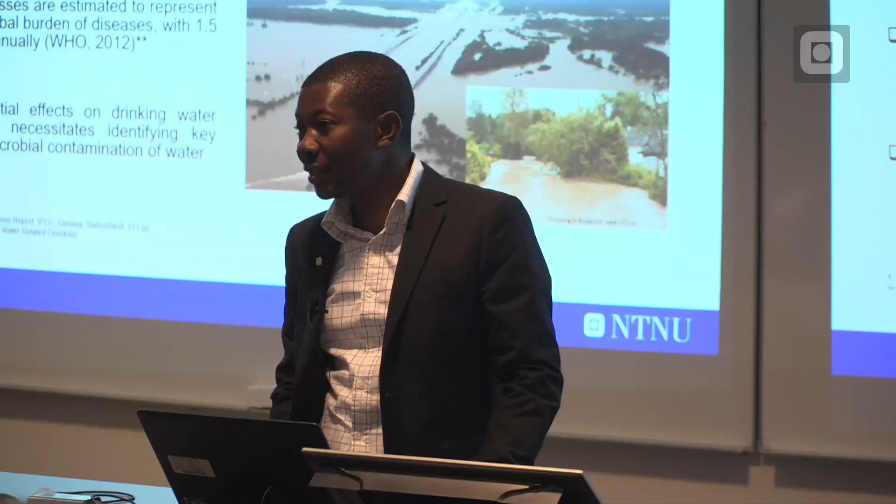There is a consensus among scientists that our climate is indeed changing. A lot of compelling scientific evidence is seen currently in the form of changes in air temperature, increases in average air temperature, and occurrence of severe weather events like severe rainstorms and droughts. According to the Intergovernmental Panel on Climate Change, the occurrence of extreme weather events is likely to increase in the 21st century.

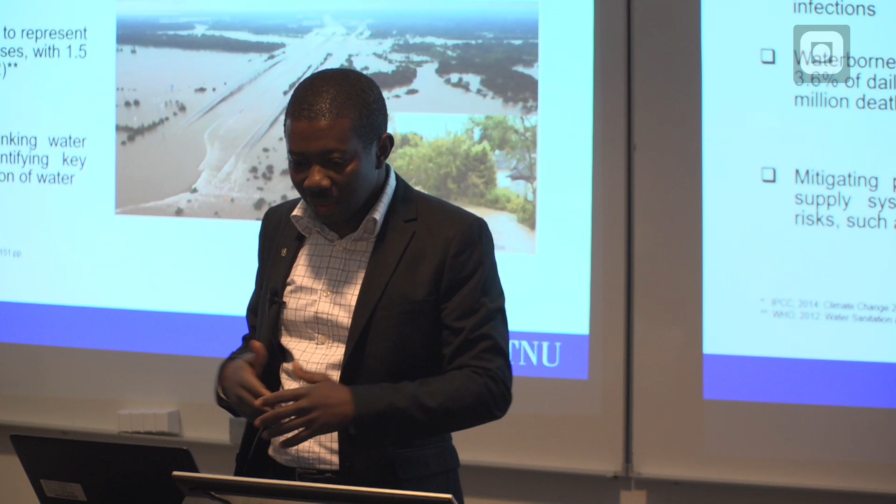These weather events, whether rainfall, flooding, or increased temperature, are linked to deterioration of the quality of surface water bodies, and these often lead to the occurrence of waterborne infections. In fact, waterborne illnesses are estimated to represent about 3.6% of the daily global burden of disease, with 1.5 million deaths occurring annually, according to the WHO.

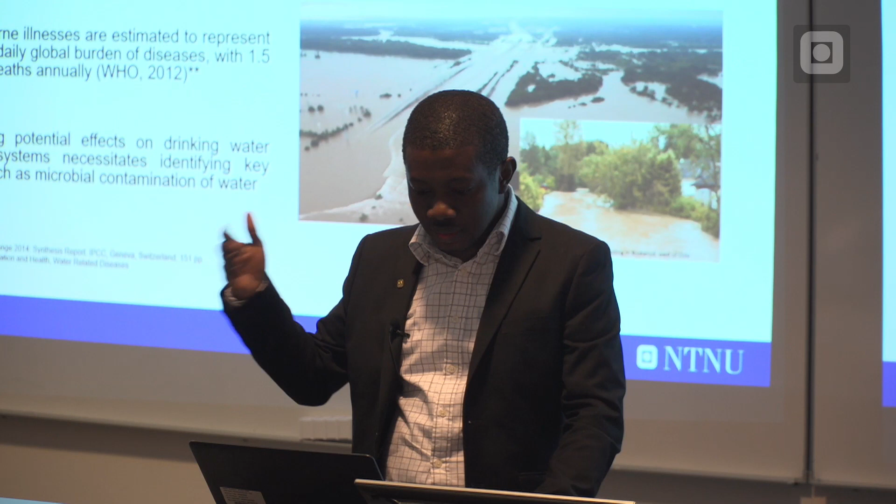In order to mitigate the potential effects of climate change on the risks of waterborne infections as a result of drinking water, it is important that key areas of risk throughout the water supply chain or system should be identified, so that corrective actions can be taken if possible.

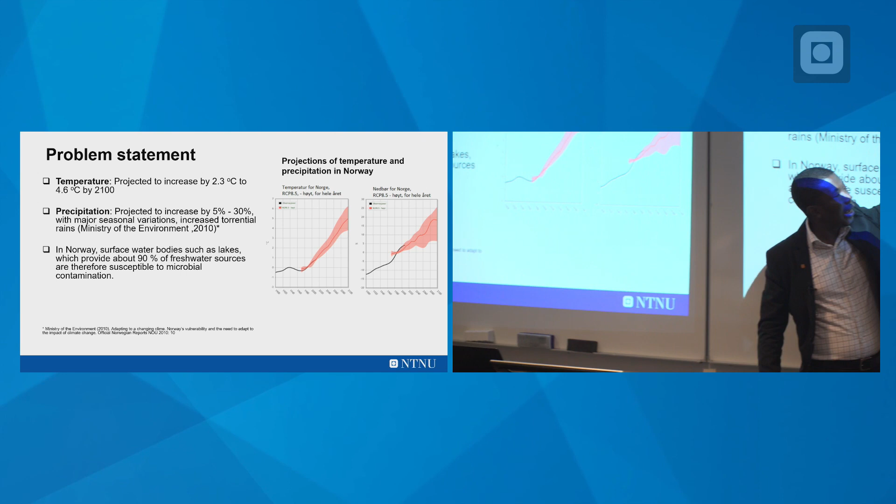Now in Norway, under the current emission rate of greenhouse gases, if the rate continues into the future, then by the year 2100 air temperature is projected to increase by between 2.3 to 4.6 degrees. At the same time, precipitation, rainfall and snow are also expected to increase by 5% to 30%, by the year 2100.

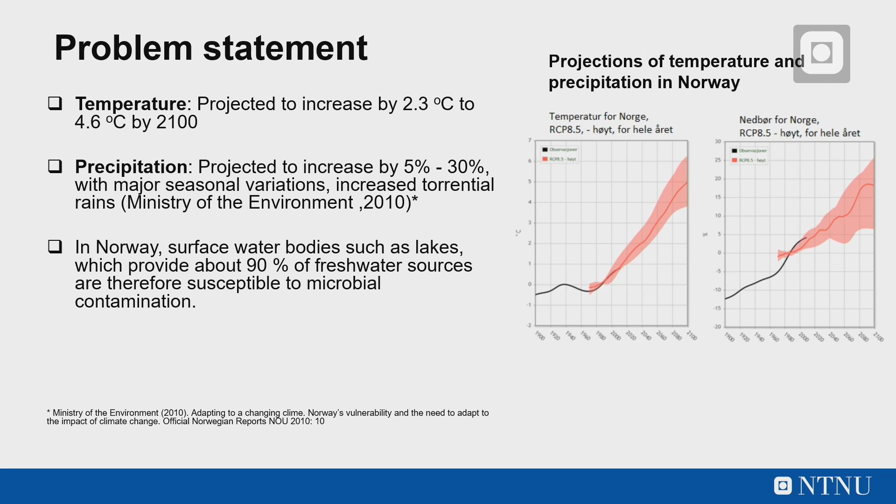One thing that's very important here is that the majority of water supply systems in Norway actually rely on surface water bodies like lakes and rivers. So if these weather parameters, temperature and precipitation, are likely to increase, then it calls for action.

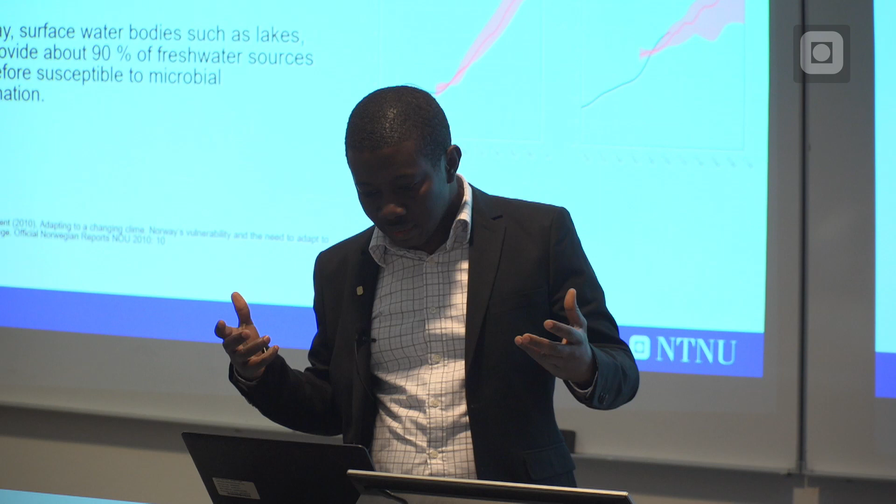At least it will be necessary for water supply systems to know the potential risks at different levels. So the aim of this research was to evaluate the potential consequences of current climate projections in Norway on the risk of pathogen infections from treated water consumption in Norway. In line with this aim, the following research questions were addressed in my thesis.

First, how could climate change affect temporal variations in source water quality under different climate scenarios - that is, the baseline and hazardous situation? Second, what are the likely effects of changing climates on the runoff and discharge of microbial organisms in the catchment of the raw water sources?

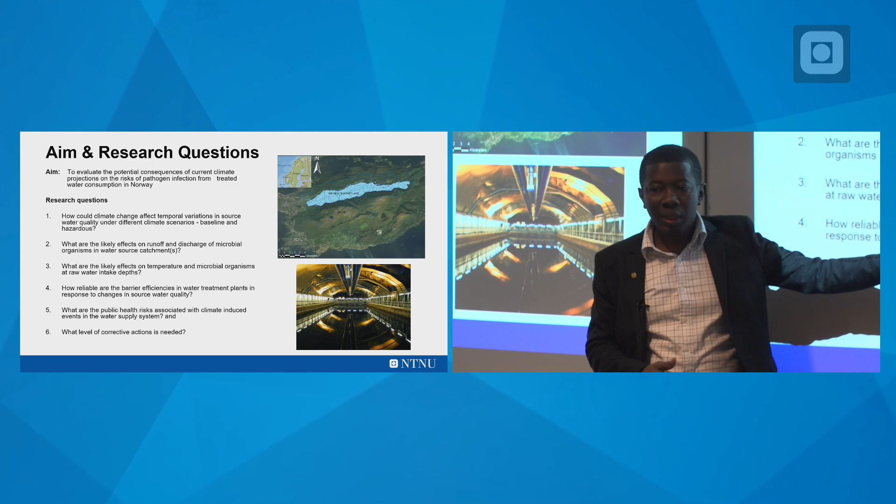What are the likely effects on temperature and microbial organisms at raw water intake points, or at depths inside the raw water source like a lake? And how reliable are the barrier efficiencies in the water treatment plants in response to any changes in the quality or microbial quality of raw water that can be linked to climate change?

And what are the public health risks associated with climate-induced events in the water supply system? And then, what level of corrective actions will be needed?

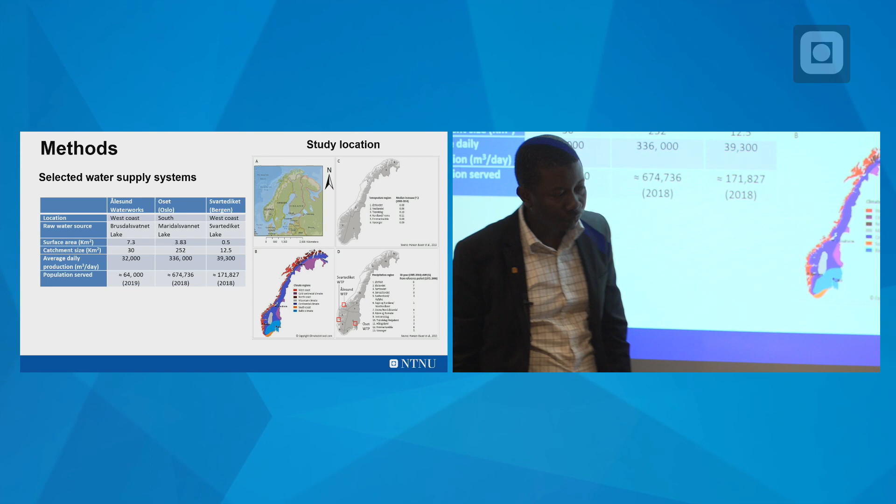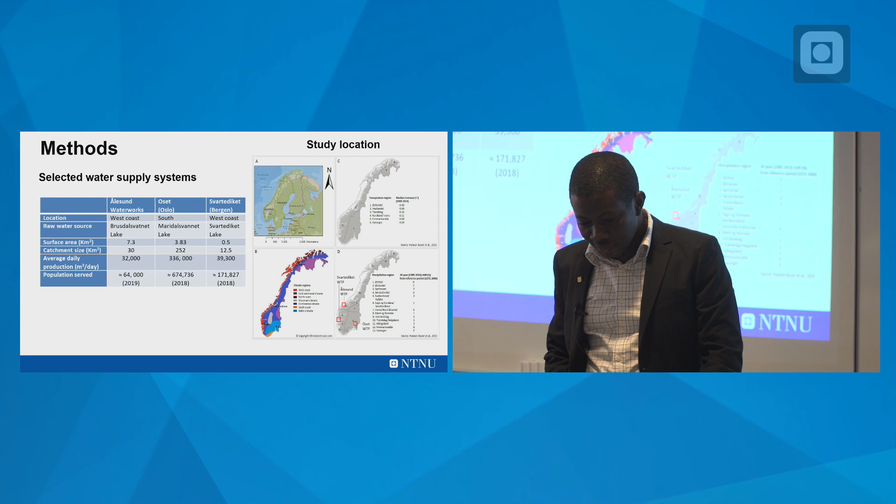The target was to cover as many regions as possible, but due to challenges with data, I focused on 3 precipitation zones, 2 on the west coast and 1 in the southern part of the country.

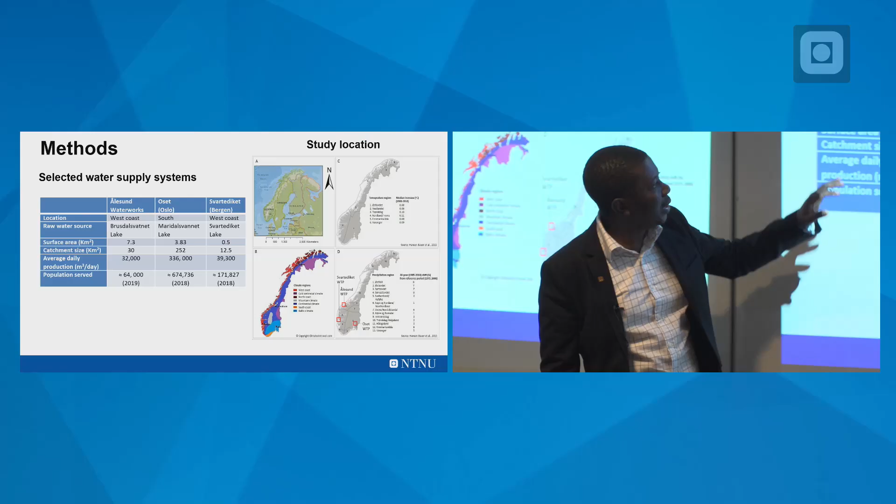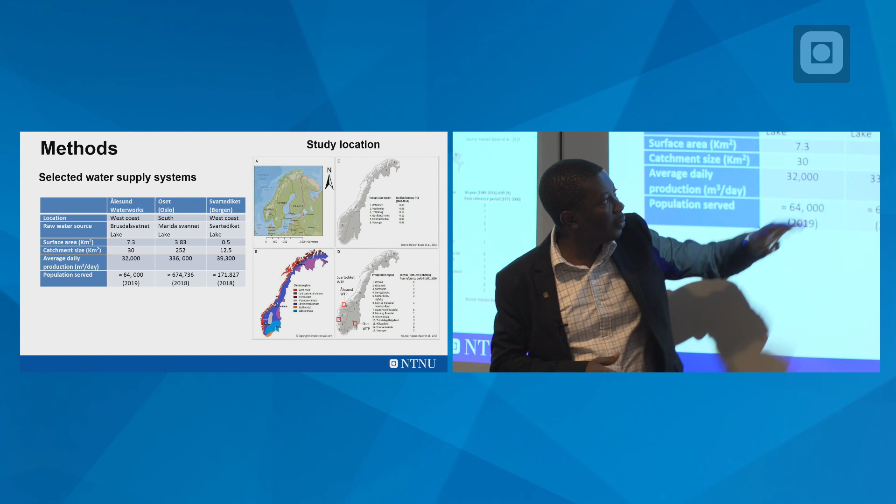The water supply systems I included in my study were mainly the Ålesund waterworks, which draws water from the Brusdalsvatnet Lake, and the one in Oslo, Oset, which is the main water supply system for the central part of Oslo and also uses water from Maridalsvannet. The last one was Svartediket Lake in Bergen.

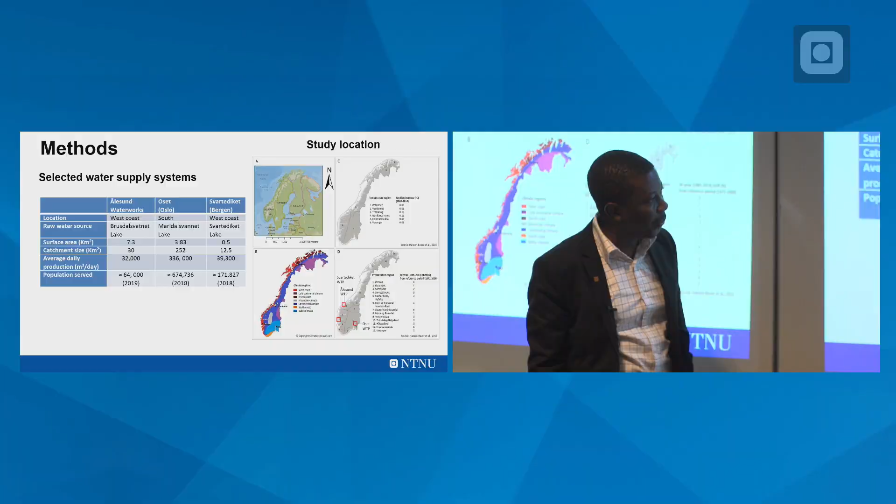Among the 3, Oslo is the largest, with daily average production of around 336,000 meter cube per day, and serves a population of nearly 670,000 as at the first quarter of 2018. So these were the main water supply systems assessed in the thesis.

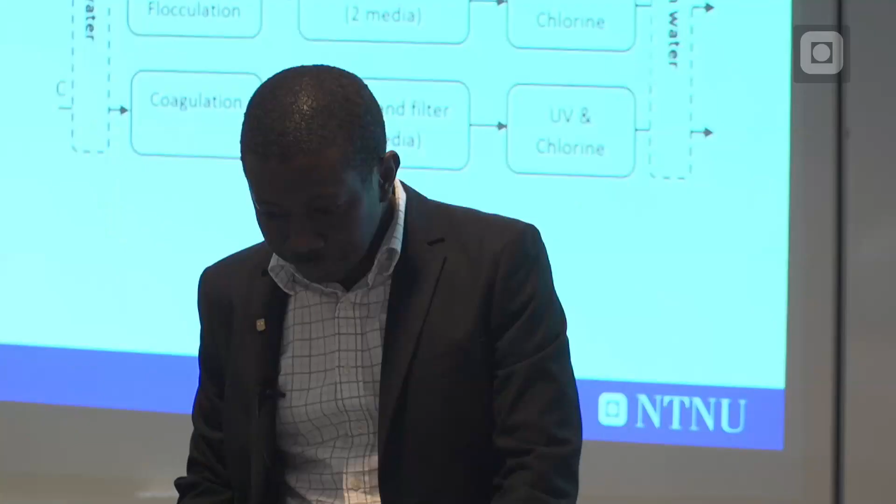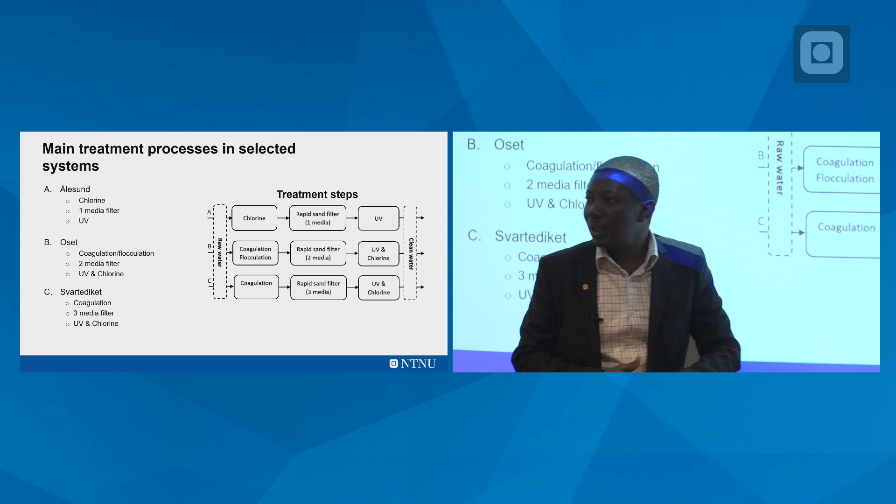These water treatment plants - Ålesund Waterworks, Oset, and Svartediket - have almost similar water treatment processes. For instance, they all use rapid sand filtration, although with varying types: Ålesund uses 1 media, Oset uses 2 media, whereas the one in Bergen uses 3 media. They all have UV disinfection.

There is some difference here: for the Ålesund Waterworks, chlorination occurs first before rapid sand filtration, and finally the UV disinfection.

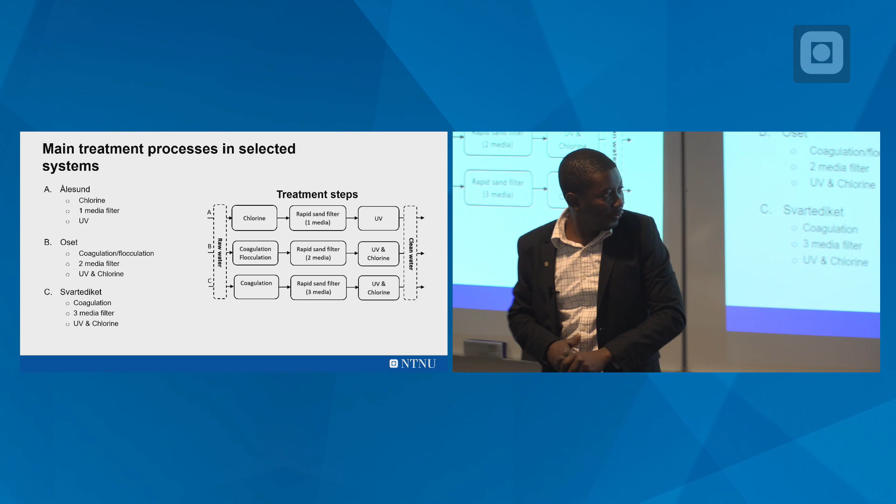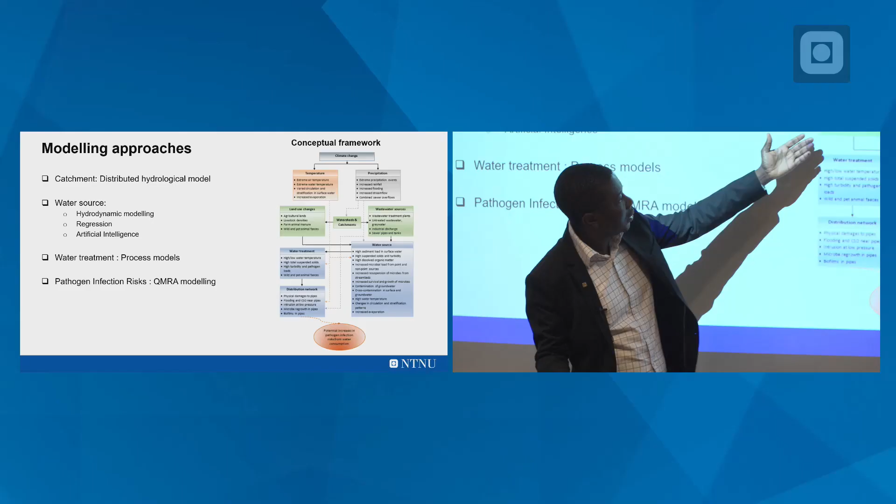In order to assess the potential effect of climate change on the water supply system, I prepared this framework as a guide, because the water supply system is composed of the catchment, the raw water source, the treatment processes, and the distribution network. I tried to look at potential impacts on runoff generation in the water source catchment, as well as discharge of microbial organisms, as that can be linked to changes in climate change, air temperature, and precipitation patterns or frequencies.

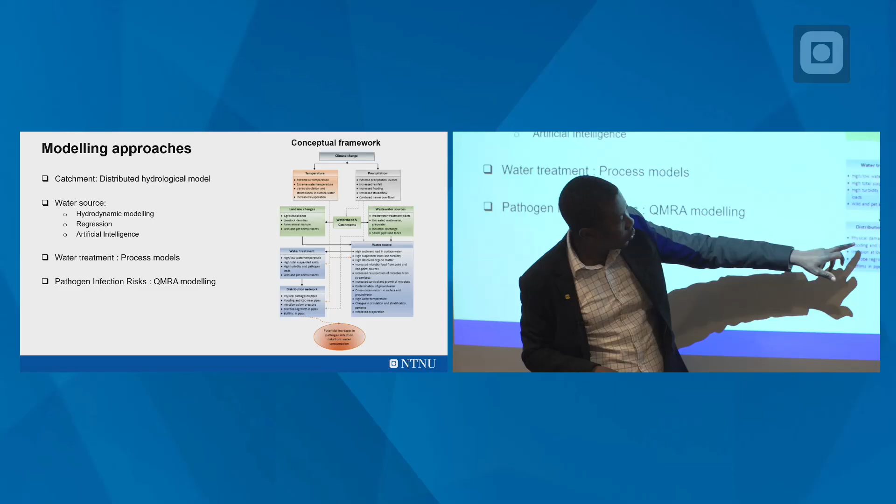I also looked at potential effects here in the water source and some aspects of water treatment. There is one important part, the distribution network, which unfortunately I couldn't account for. From the results, I was able to calculate potential risk at the end of the water supply system with respect to consumption.

In the water source catchment, I applied hydrological modeling. Within the water source, that is the lake, I applied a combination of hydrodynamic modeling as well as regression and artificial intelligence models. In the water treatment stage, I applied process models to calculate the log reduction or efficacies of the treatment steps in removing pathogenic organisms from water. Finally, I applied quantitative microbial risk assessment modeling to calculate the pathogen infection risk associated with water consumption both presently and in the future.

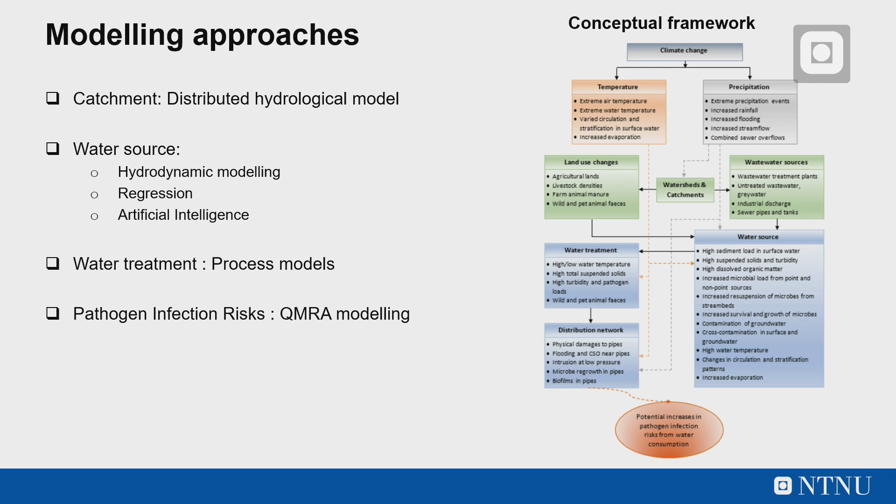A quick look at the various modeling approaches at the various steps. As I said, I used a hydrological model in the water source catchment, and the model used here is the Soil and Water Assessment Tool, which is a physically based and distributed hydrological and water quality model.

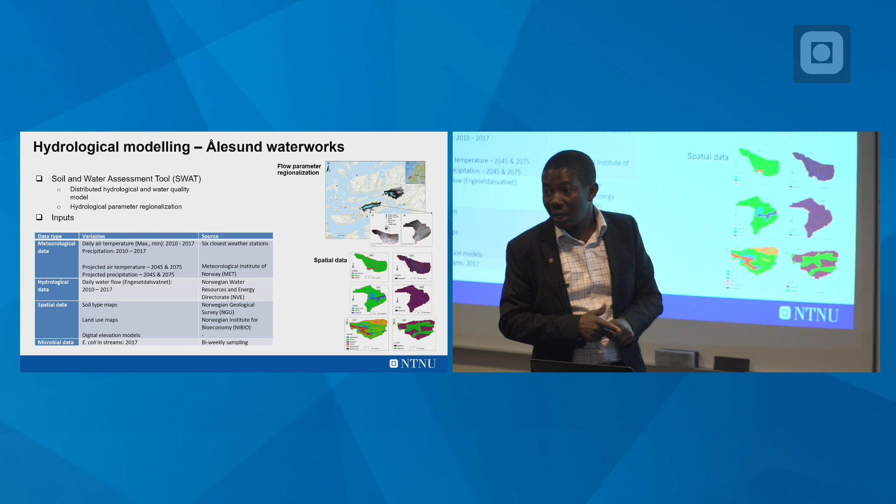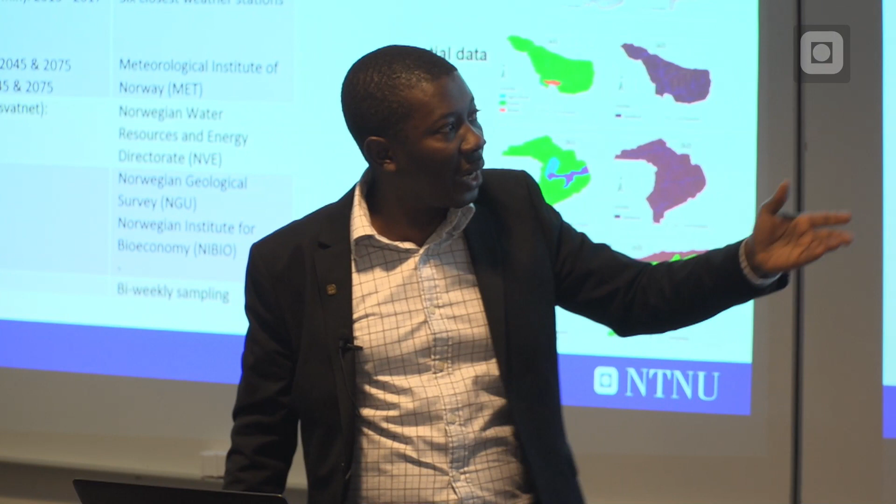Because it is physically based and distributed, the catchment is subdivided or discretized into different areas known as hydrological response units. For each division in the catchment of the water source, we define specific spatial and weather characteristics, so that flow or runoff generation is calculated for specific areas and finally combined. I applied this hydrological modeling at the watershed or catchment of Brusdalsvatnet Lake, which is the water source for Ålesund commune.

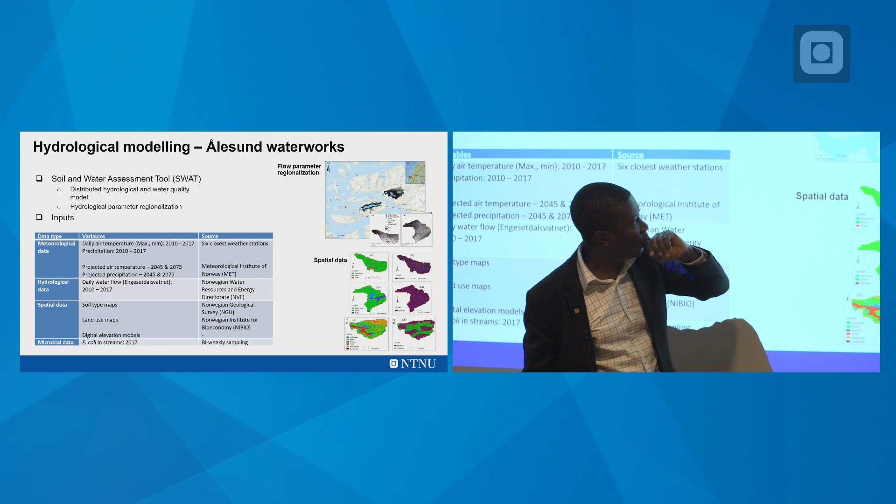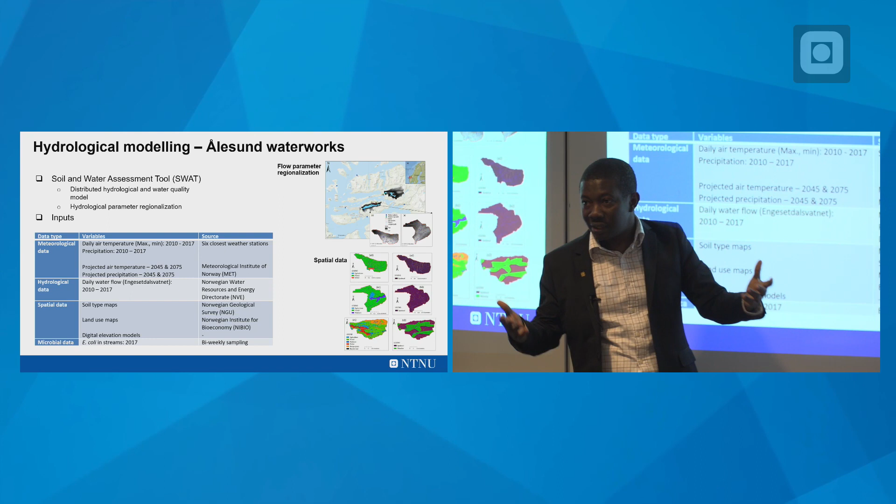But currently this lake is not gauged, so in order to calibrate the hydrological model, I used a method commonly applied in hydrological modeling known as flow parameter regionalization. When we have catchments that are close by and share similar spatial and meteorological characteristics, it is possible to calibrate the model for a gauged catchment and then transfer the parameters to assess runoff and other contaminants in the other catchment.

That's the method I applied, and the main inputs were daily air temperature, maximum and minimum values taken between 2010 and 2017, precipitation data for the same period, as well as climate projections of precipitation and air temperature for 2045 and 2075.

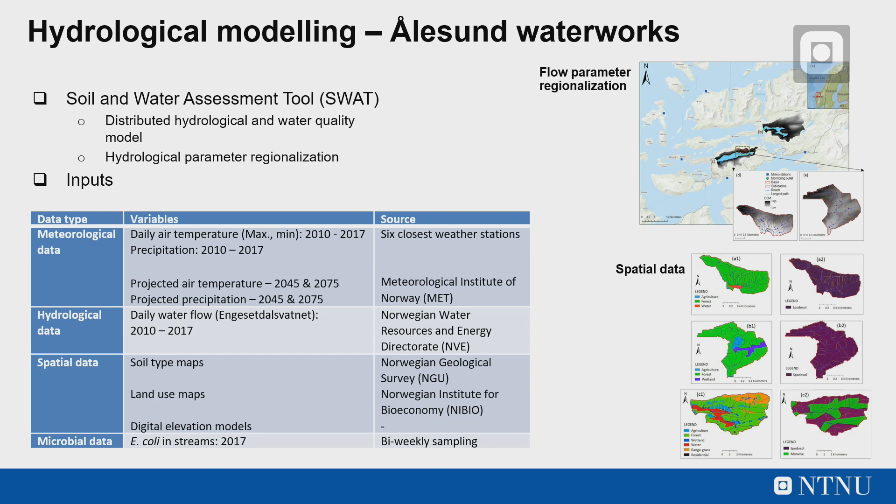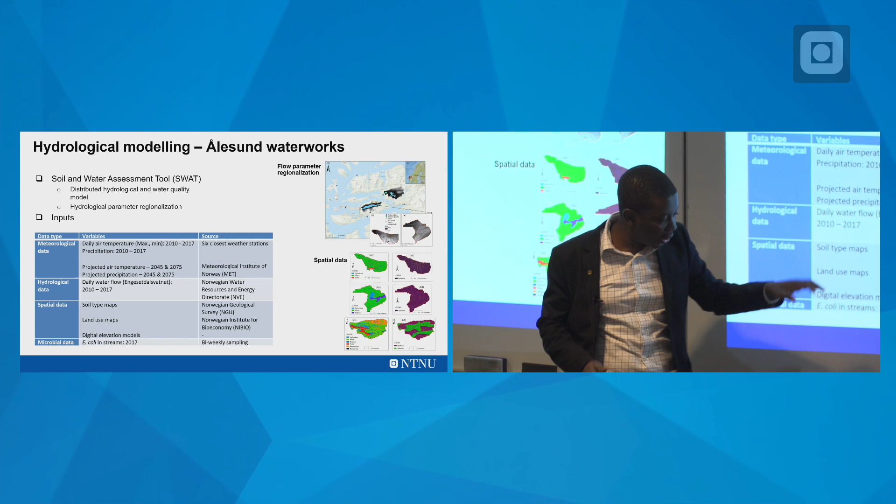And then I use the flow data from the donor catchment, which is the Engeset Dals Lake, also for the same period. Of course, other data included soil type maps, land use, digital elevation models, and I also carried out some sampling of the streams that discharge into the lake in order to compare with the model results.

Inside the water source, as I said, I applied the hydrodynamic modeling, and the system I use is known as the Generalized Environmental Modeling System for Surface Water. It is a hydrodynamic and water quality model that relies on the solution of shallow water equations and other auxiliary ones.

The main inputs here were air temperature, pressure, cloud cover, etc., as well as the hydrological data from the calibrated model, because the hydrological model was calibrated for the major streams, 4 of the major streams around the lake. So I use that as an input to assess how these changes in the flow patterns can affect the occurrence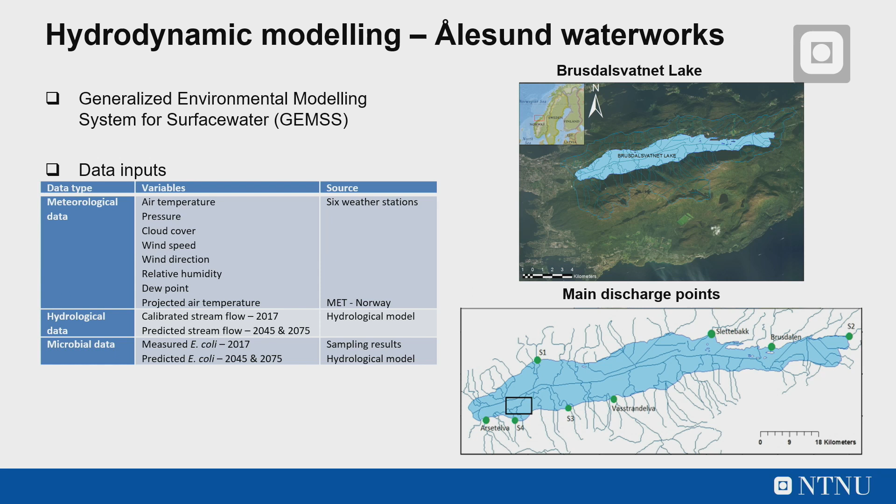of the microbial organisms in the lake, both presently and in the future. And then in the same water source as well, I applied both statistical models, as I mentioned, the regression, zero inflated Poisson regression, and zero inflated negative binomial regression to predict the occurrence of microbial organisms at the raw water intake points in the lakes or the surface water bodies. Now, I also applied artificial intelligence models for the same purpose.

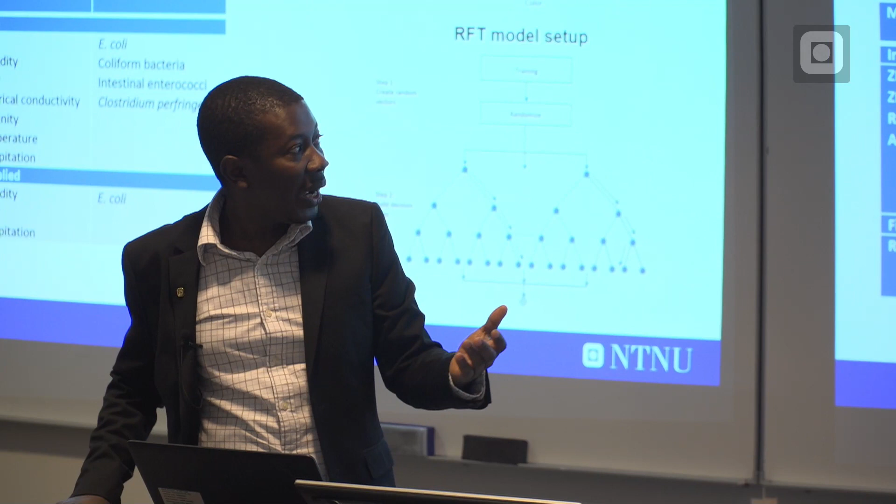Currently, with the level of advancement in artificial intelligence models, they are so efficient, they are indispensable in terms of modeling very complex systems. But in the case of water supply systems, the application is quite minimal. So I also explored the possibility of applying some of these highly efficient methods in predicting the occurrence of the pathogenic or microbial organisms in water.

That study actually involved 2 stages. First, I performed a comparative study where I combined or used each of these models to predict mainly E. coli, coliform bacteria, intestinal enterococci, and Clostridium perfringens in the water source for Oset, that's Oslo. The main inputs I used were pH, turbidity, color,

alkalinity, water temperature, and catchment precipitation. And based on the performance of the models, I selected one of them, which is the random forest model, to apply in the 3 raw water sources to predict concentrations of E. coli. And in that case, I used turbidity, color, and precipitation as the main inputs.

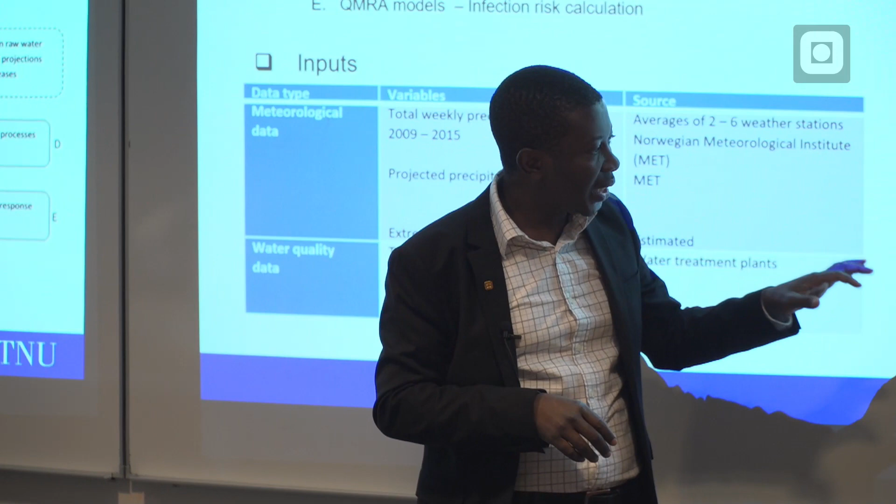And in the QMRA, actually this one involved 5 distinct steps, and each of them is composed of different modeling techniques. What I did was I wanted to predict, based on the current projections of precipitation in the catchment of the raw water sources, the potential effect on the pathogen infection risk as a result of water consumption in each of the 3 water supply systems.

So I first applied regression models to establish statistically significant relations between catchment precipitation and measured records of turbidity and color in the raw water sources. I also used climate projections or projections of precipitation and air temperature to adjust the historical records of precipitation that I use in the regression models.

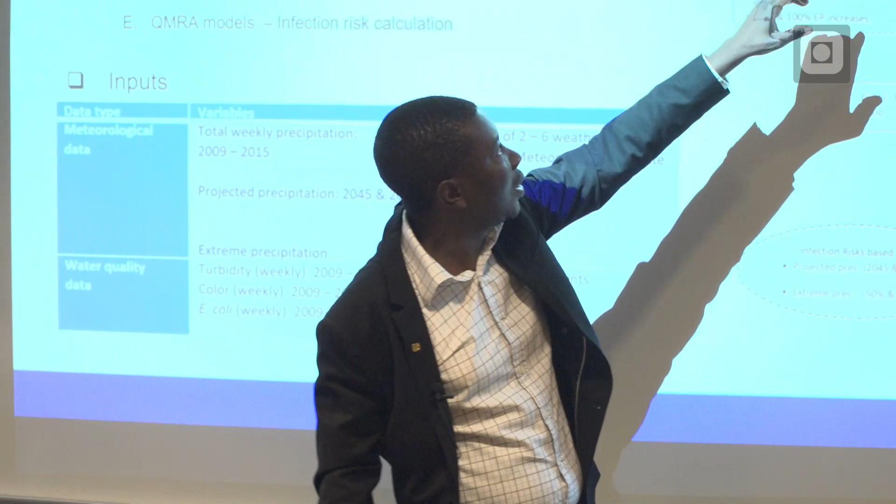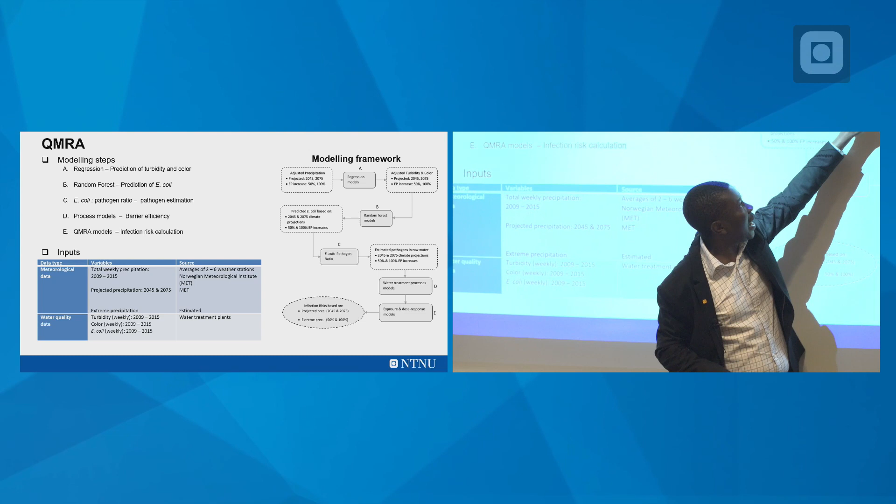So I had my regression models, I adjust my precipitation based on predictions or projections of climate change, then I'm able to estimate or predict potential concentrations of color and turbidity in each of the raw water sources for 2045 and 2075. At the same time, I also use another scenario using the same method to simulate or assess the potential effect of the occurrence of extreme weather events or extreme precipitation.

In that case, I estimated extreme precipitation as rainfall data that is more than or equal to 3 standard deviations of the recorded precipitation time series, and I used that with the same method to also predict these parameters. So I had them for 2 scenarios.

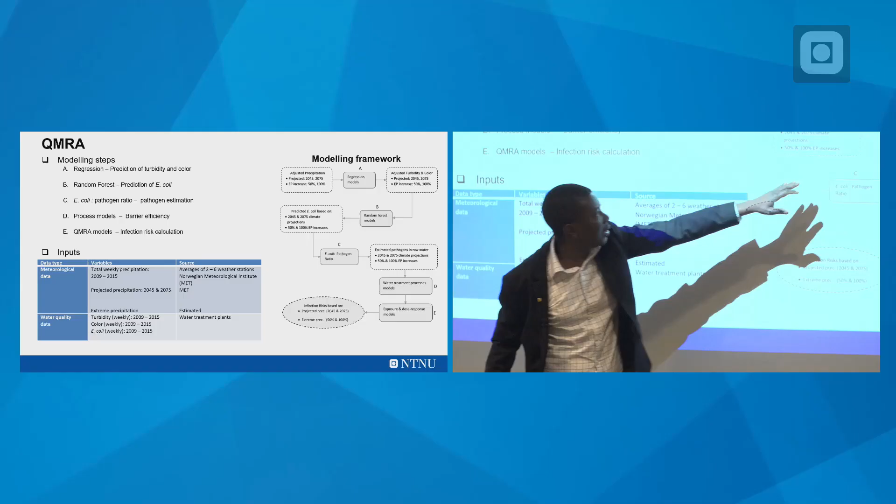And I also used random forest, as I indicated, to predict E. coli. That was based on the historical records. So having applied this already, I have projections for color and turbidity.

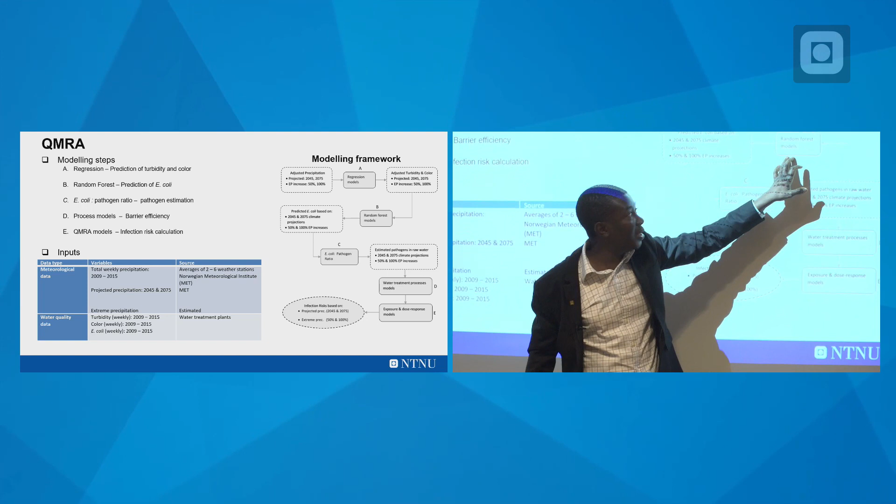So with the model that has already been trained, I was able to predict potential concentrations of E. coli from these ones. From that, I estimated concentrations of pathogens from these E. coli, that's the present ones, or the present concentrations and the predicted concentrations of E. coli.

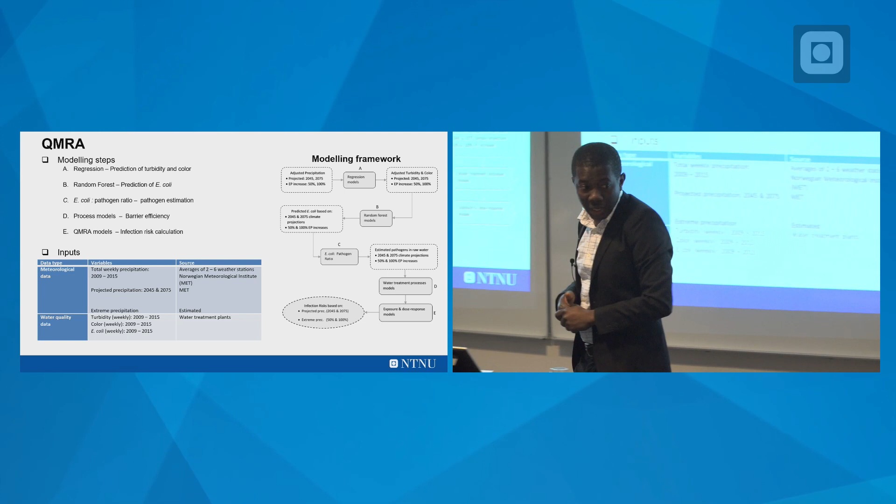And the main pathogens I calculated or estimated were norovirus, Cryptosporidium, Giardia, and Campylobacter. Then I used process models to predict the levels of log reductions or treatment efficacies of the treatment process for each of the water treatment plants. So I subject the time series of the microorganisms into the treatment processes, calculate log reductions presently and in the future, and then use quantitative microbial risk analysis or models to estimate potential infection risk, both based on projected temperature, catchment precipitation for 2045 and 2075, as well as extreme precipitation events.

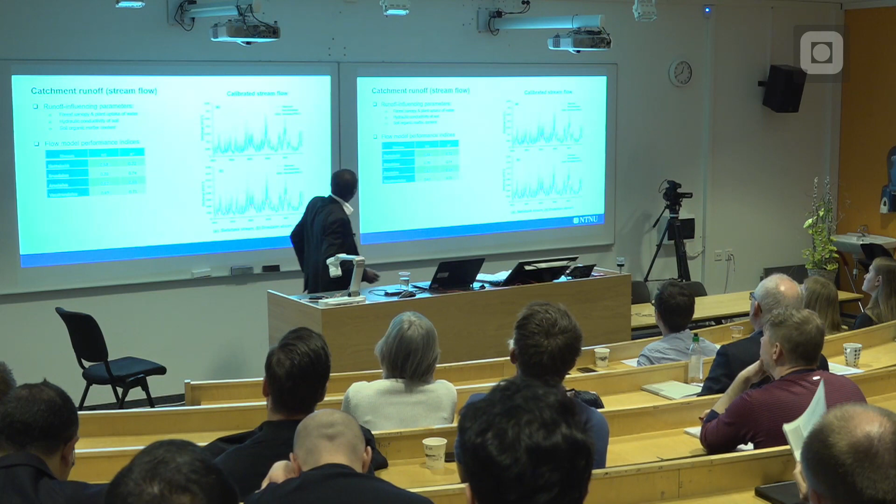Now let's look at some of the main results. Catchment runoff, as I said, the model was calibrated between 2013 and 2016, and then I used the remaining 2-year data to test the model.

These are the results for two of the streams that were calibrated. The results indicated that, apart from the input precipitation and air temperature, the main parameters in the catchment affecting the runoff generation process were mostly the forest canopy—that is, the proportion of trees in the catchment and how much water they take—as well as the soil hydraulic conductivity and organic matter content.

Pretty good model assessment or performance measures were obtained, as shown in the R-square and the Nash-Sutcliffe efficiency, which is another parameter used in hydrological modeling.

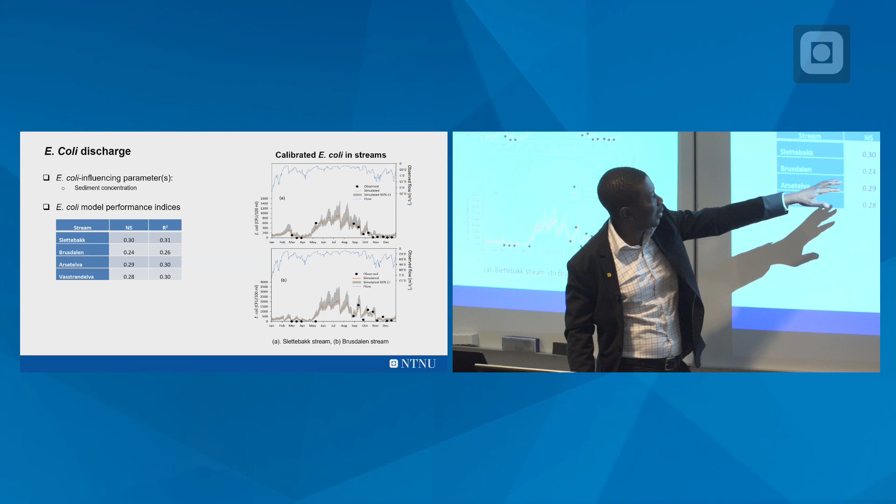This is a sample of the predicted or calibrated E. coli model in the streams. Clearly, the R-square and NS values were very low compared to the runoff or stream flow. But the model was still able to predict some of the patterns with acceptable or good accuracy.

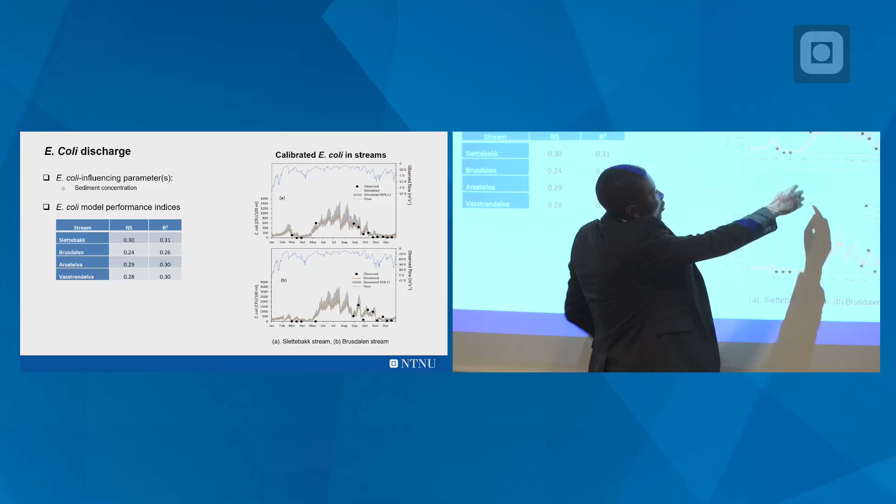You can also see that here, during the sampling period between May and September, I couldn't actually carry out any sampling. So it's possible that this may have affected the R-square value calculated.

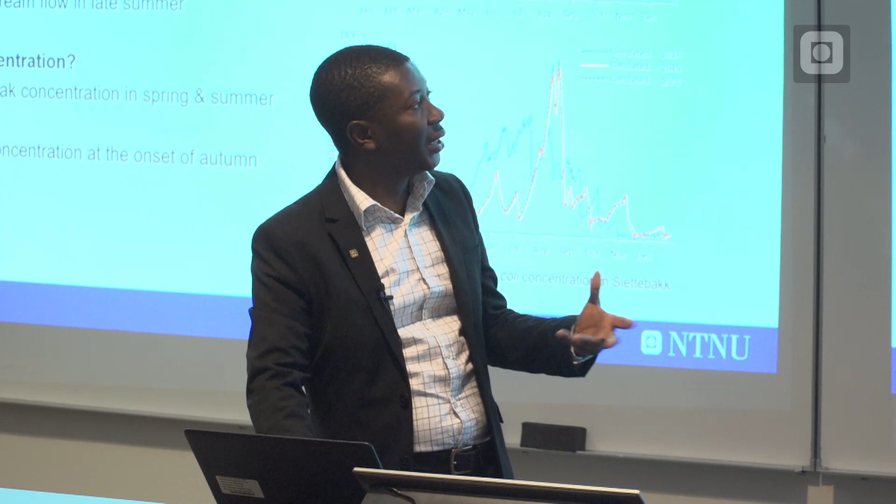So I applied the projected precipitation and air temperature to the hydrological models to predict how runoff in the catchment will change in the future, as well as the concentrations of E. coli.

I realized that the peak flow often occurs in April or in spring, between April and May—that is in the historical flow. But the predictions for the future, in 2045 and 2075, indicate that these peak flows could occur a bit earlier in the future.

Similarly, when we look at the historical flows, it's usually low in summer, but the future predictions indicate that the summer flow levels could increase.

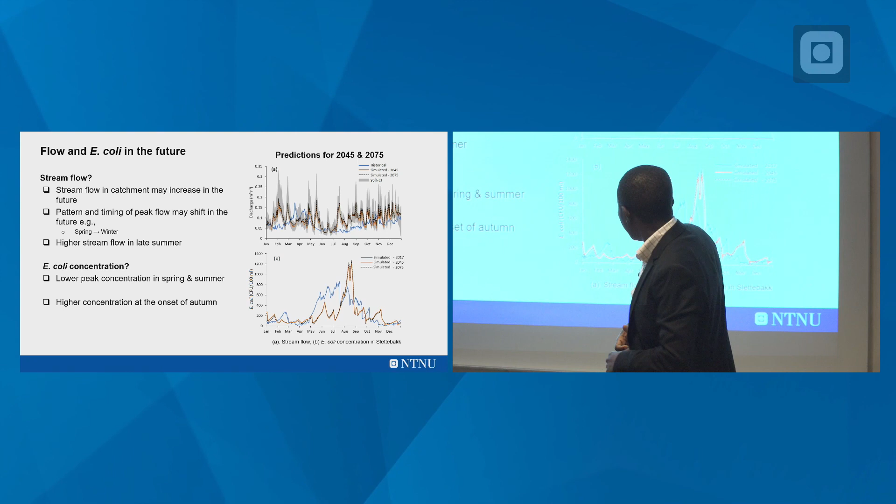For the E. coli concentrations, it was found that compared to the historical pattern, the predictions show that concentrations which are currently higher in summer are likely to be lower during summer in the future. But at the onset of the autumn season, which is late August or beginning of September, we see high peaks of the concentrations of the microbial organism in the raw water source.

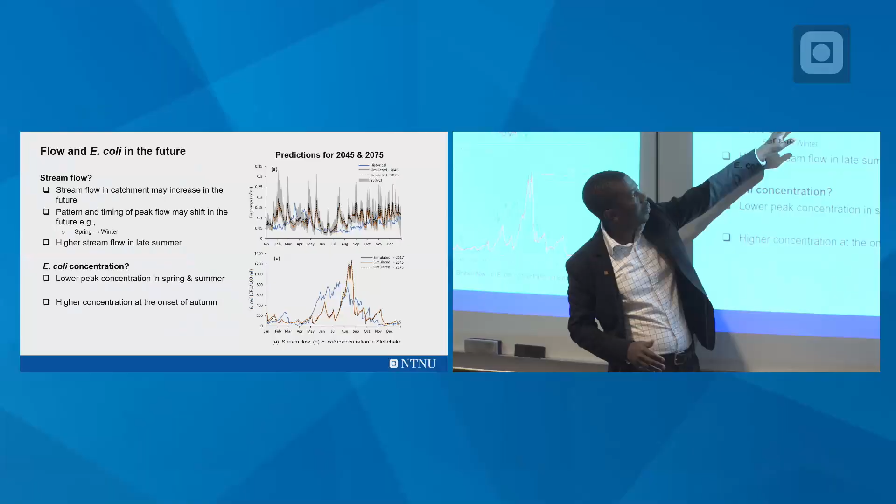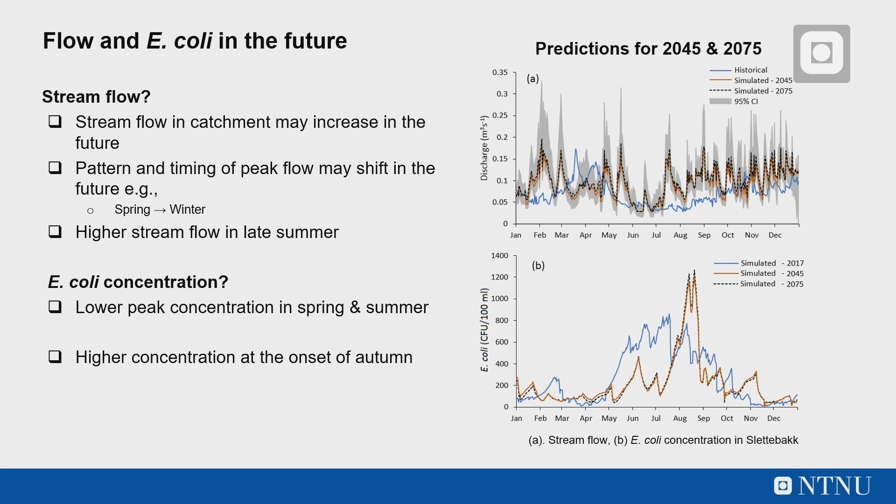So in actual fact, the stream flow in the catchment is likely to increase in the future, with implications for other surface water bodies in the region. The pattern and timing of the peak flow is likely to shift, with higher flow in the summer. The predicted E. coli concentrations show lower peak concentrations in spring and summer compared to current observations.

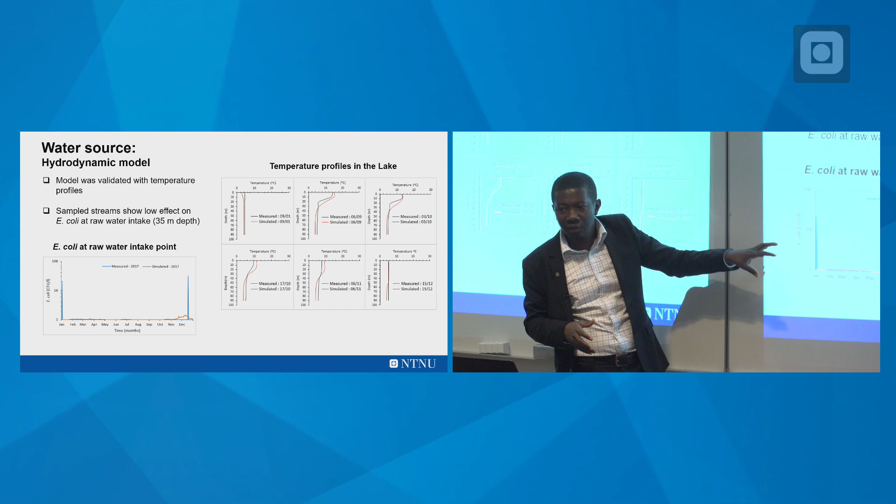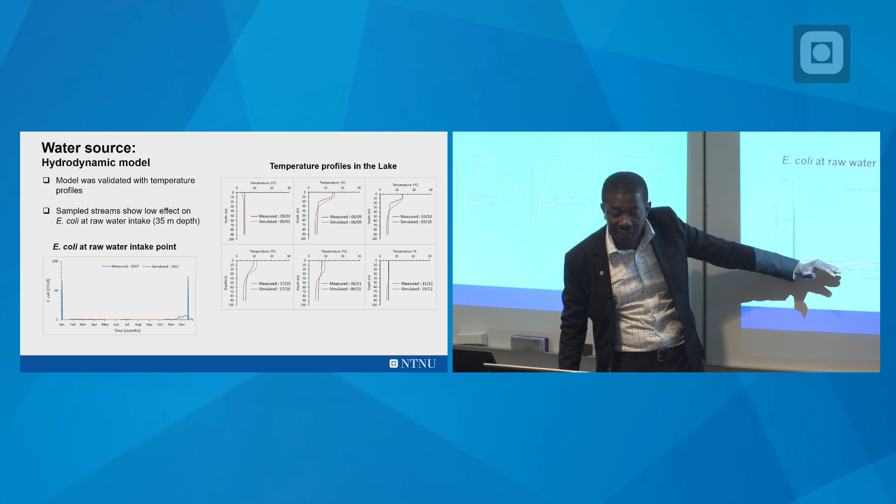The E. coli model wasn't precisely calibrated in the hydrodynamic model, mostly because the usual pattern of observations in the lake differed. The concentration measured by the water treatment plant in 2017 was a bit different from the usual pattern, because typically higher concentrations are observed in spring and autumn, mostly due to vertical mixing in the lakes.

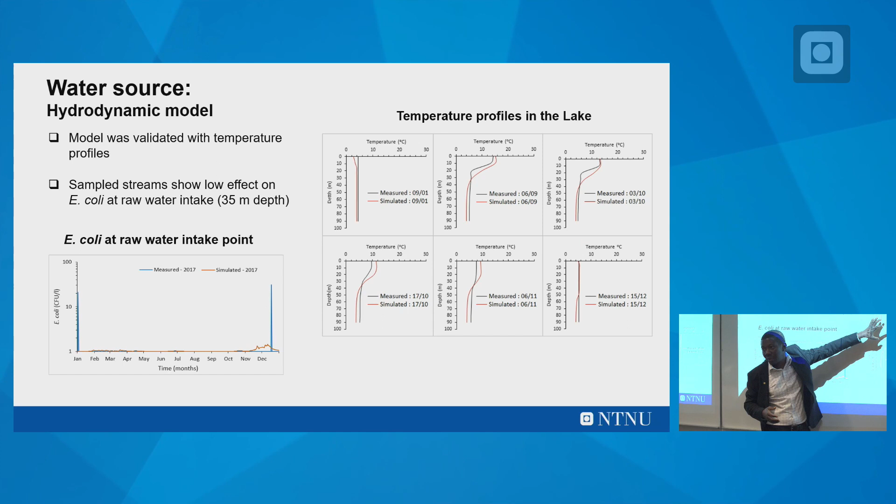It was difficult to calibrate the E. coli model, but I realized that these temperature changes are associated with dynamics in the lake, and since the E. coli model in the overall hydrodynamic model is coupled with the temperature model, calibrating the temperature model well would give a good indication that the E. coli model was also good.

One thing I observed is that since very low concentrations were predicted by the model, it means the discharge or input from the streams used to predict these concentrations are actually underestimated. There could be other important sources of discharge into the lake that were not identified.

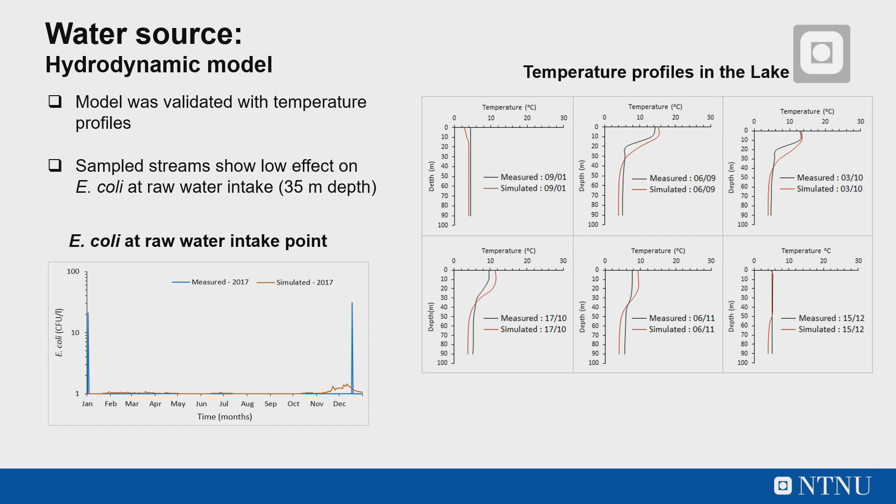So my projections or predictions for the future are actually based on how much was predicted currently, and not necessarily the concentrations that were observed in 2017.

I also looked at these circulation periods—how the current projections of air temperature are likely to affect the circulations in the lake. These circulations are periods where water temperature at the surface and the deeper parts of the lake are almost equal because of vertical mixing. Once that mixing happens, contaminants at the surface are more likely to reach deeper zones where raw water is taken.

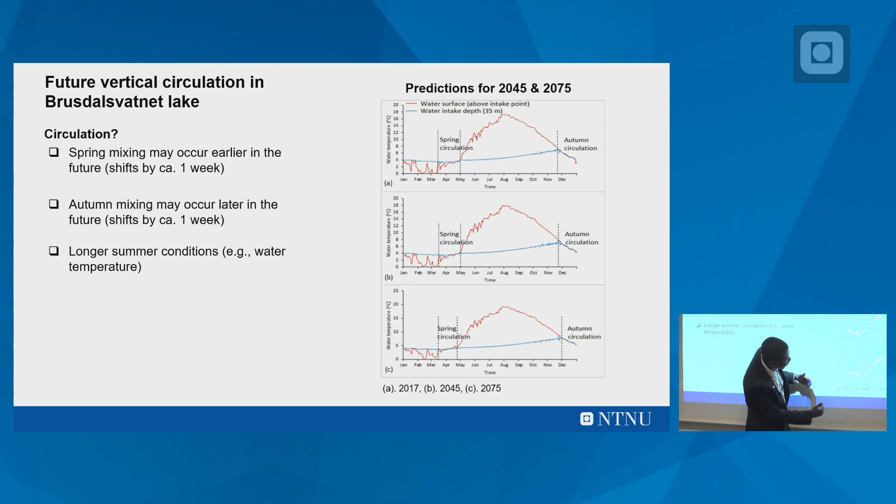It was observed that compared to 2017, the circulation periods—both the spring and autumn circulation—in 2045 actually start and end almost at the same time. The spring one starts around mid-March, and it's almost the same for the autumn circulation. But for 2075, the circulation started at the same time, but ends a bit earlier than it used to in previous years.

At the same time, the autumn circulation also starts a bit later compared to 2017, or the current one, and of course 2045. This means there will be a long stretch of summer conditions in the future, and the implications could include sustained water temperature at the surface.

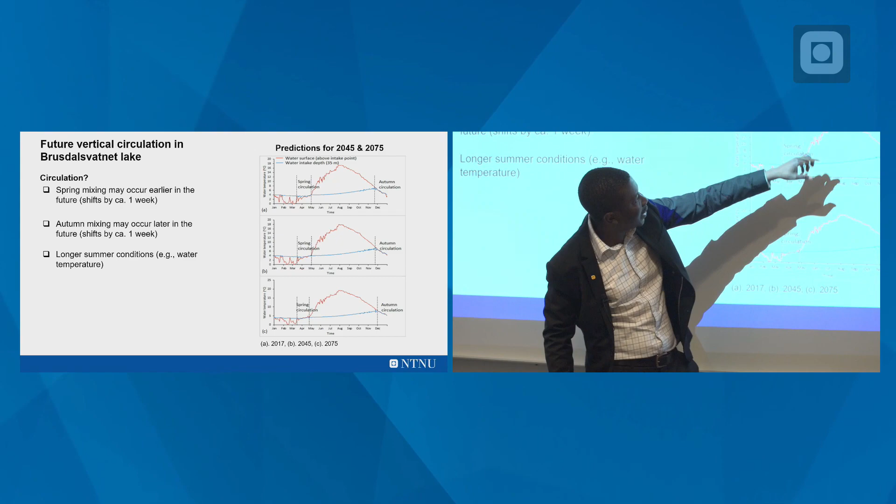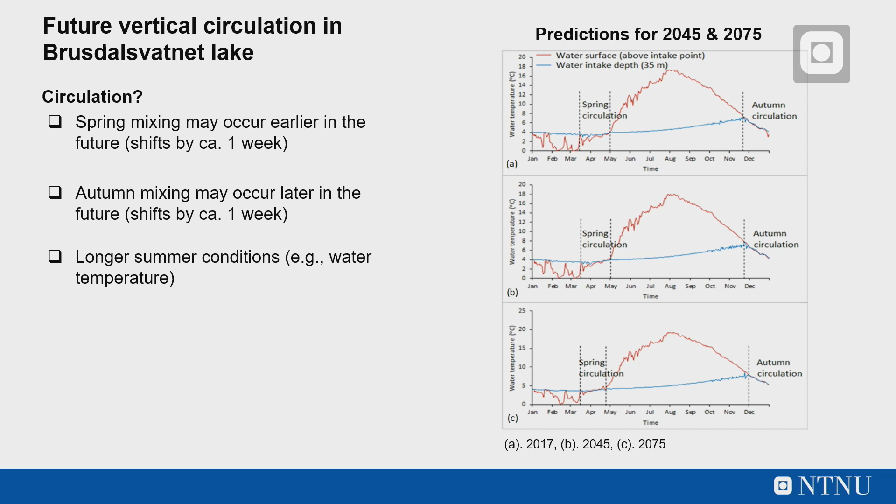I also realized that the intensity of mixing, compared to the current mixing, is quite higher for both spring and autumn. There's likely to be more perfect mixing in the future, and more perfect mixing means more contaminants getting to deeper parts.

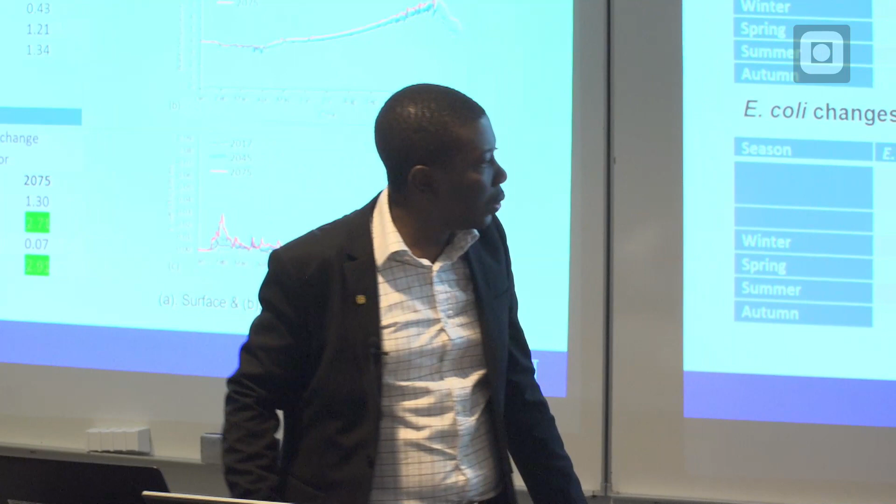I compared the current temperature in the lake at the surface and at the water intake point depth of 35 meters below the surface. It was found that by 2075, temperatures at different seasons are likely to increase by some factors, with the largest increase likely in the autumn at the raw water intake point. Some increase is also expected at the surface, as can be seen here.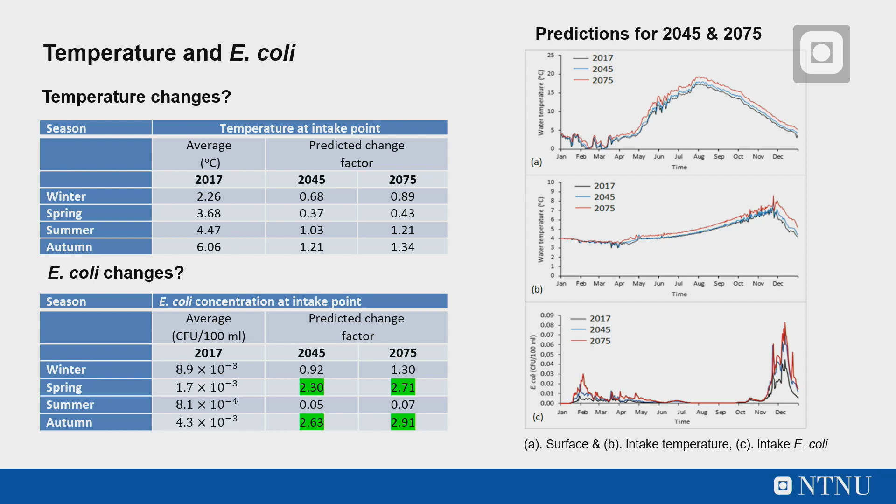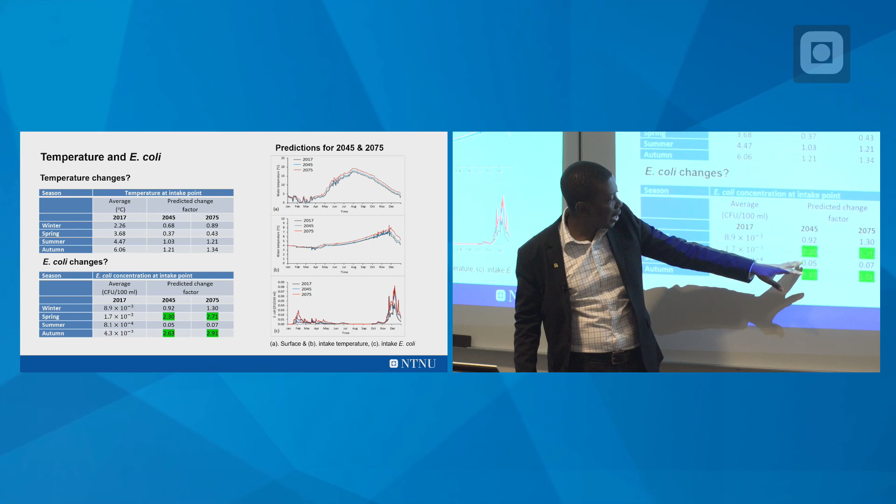For the E. coli predictions for 2045 and 2075, these are mainly based on changes in precipitation. Other factors or changes in the catchment were not factored in, so this is just a relative proportion by which concentrations can change. It was found that in the spring and autumn seasons, the average concentration could increase by a factor of almost 3 for both seasons in the future.

Now some results from the predictive models applied in the thesis. I applied zero-inflated models, random forest trees, and the ANFIS models, and compared them to see how well they predict the concentrations of microbial organisms.

These figures show the results for coliform bacteria and E. coli. It was generally found that of the four modeling approaches, random forest was very superior, as can be seen in the testing results for coliform bacteria here, in terms of capturing all the intense variations in the data.

The zero-inflated models, the ZIP and the ZINB, were quite good but failed to predict the peak concentrations, which are very vital for optimizing treatment processes to avoid potential infection from water consumption. They were not able to predict these high concentrations, but were fairly good at predicting zero concentrations and some of the lower concentrations. There were also some false positives predicted.

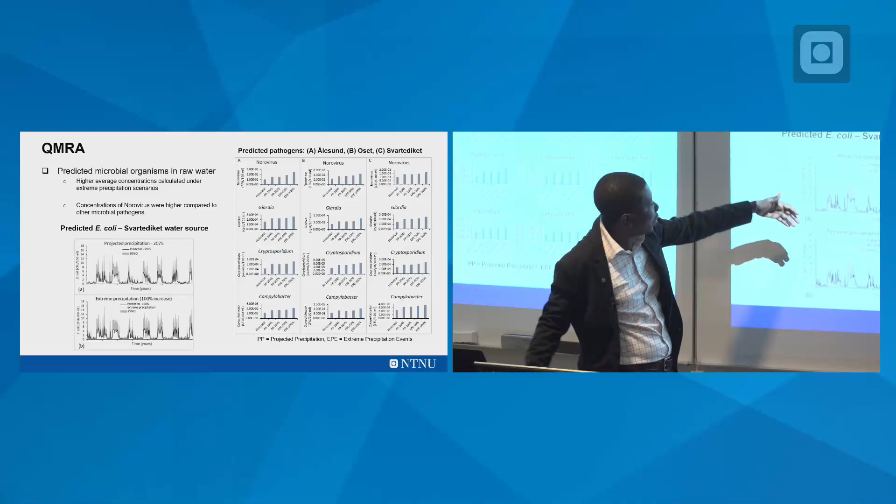So I used the random forest model for subsequent studies. This model, as explained earlier, was used to predict the concentrations of E. coli in the raw water sources under different scenarios, climate projections, as well as extreme precipitation scenarios.

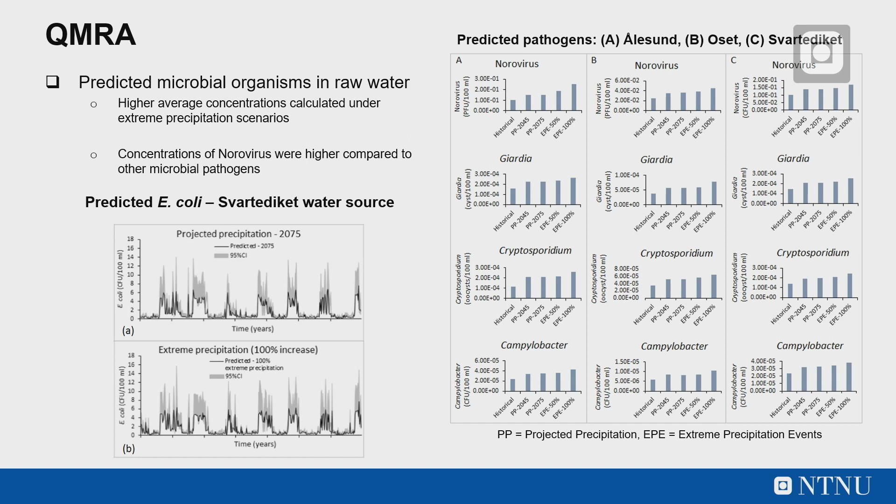From this, I calculated the concentrations of the pathogens. The concentration of each pathogen was a bit higher when calculated under the extreme precipitation event compared to the normal climate projections. Compared to all the other pathogens, norovirus actually showed a higher concentration in all the raw water sources, but the main reason, I think, was the ratio between E. coli and the pathogens used in the calculation.

Then some results of the log removal efficiencies of the treatment steps for each of the treatment plants. The log removals were actually calculated as a triangular distribution, with a mean, a minimum, and a maximum.

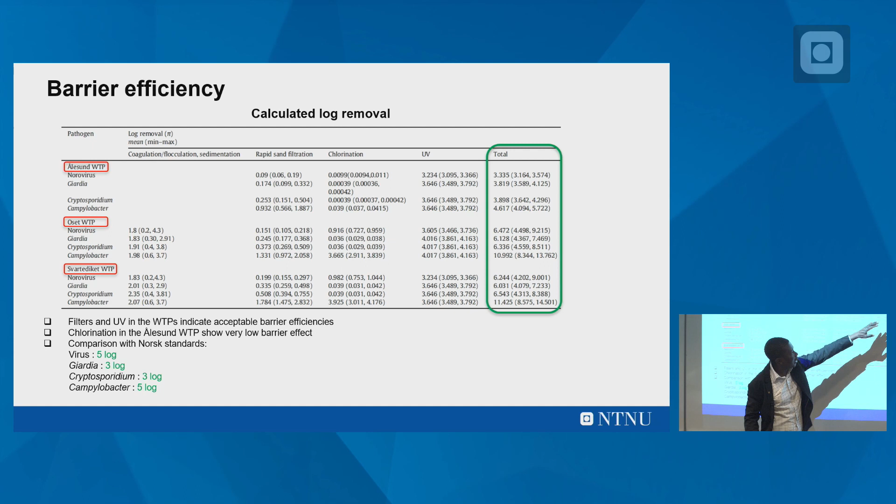Generally, the filters and the UV steps in all the water treatment plants were of acceptable efficiency. But then it was found that the chlorine step in the Ålesund water treatment plant was a bit low in terms of its barrier effect.

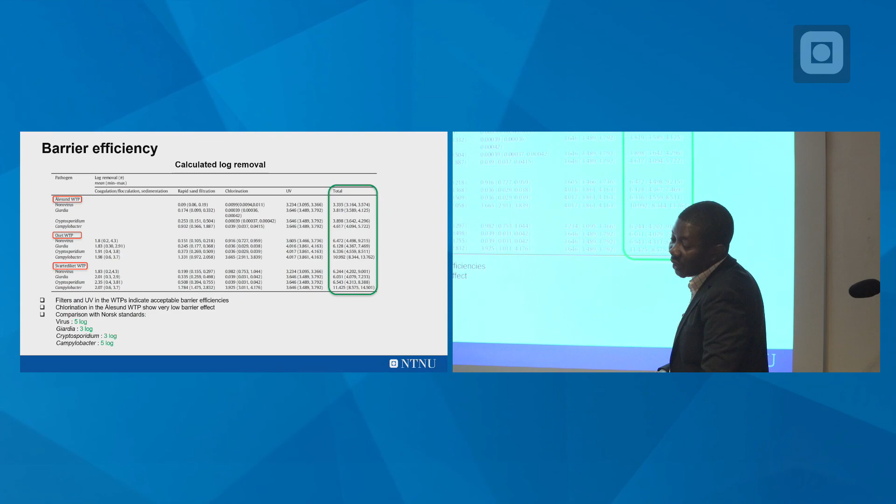Compared to the Norsk standards for acceptable levels of log removals of each of these pathogens by water supply systems of this nature, it is possible to say that all the water treatment plants are mostly within range for each of these microbial organisms.

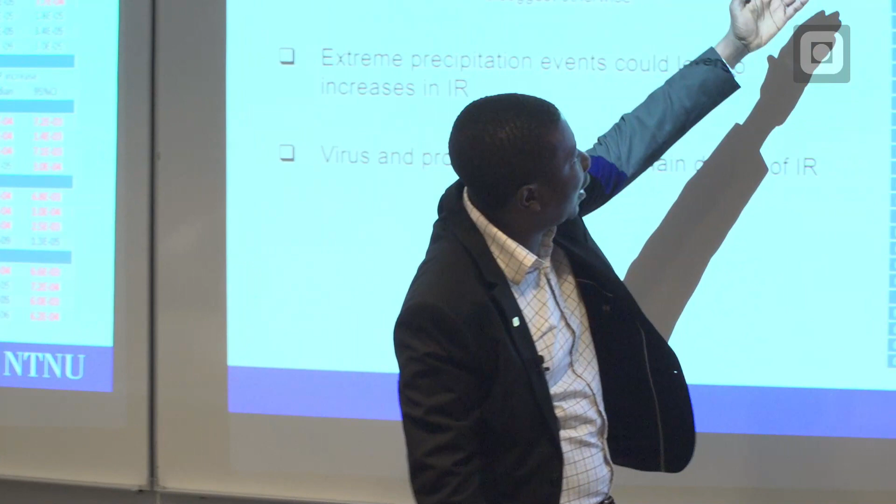Finally, the pathogen infection risk was calculated from the predicted concentration of the pathogens. These values indicate the probabilities that if you consume water from any of the treatment plants, you can get an infection from maybe norovirus, etc., or other pathogens.

The main benchmark I used to assess the level of risk is the WHO and US EPA value of 1 person in 10,000, expressed as 10 to the power minus 4. So values higher than this indicate potentially high risks.

And like I said from the beginning, this was done, or the infection risks were calculated, under two scenarios. First, for the predicted climate projections of precipitation and the occurrence of extreme precipitation in the catchment of the raw water sources.

It was realized that generally under the current predictions of precipitation, the potential pathogen infection risk, both presently and in the future, may be quite low, even though for some of the water treatment plants the confidence interval suggests otherwise.

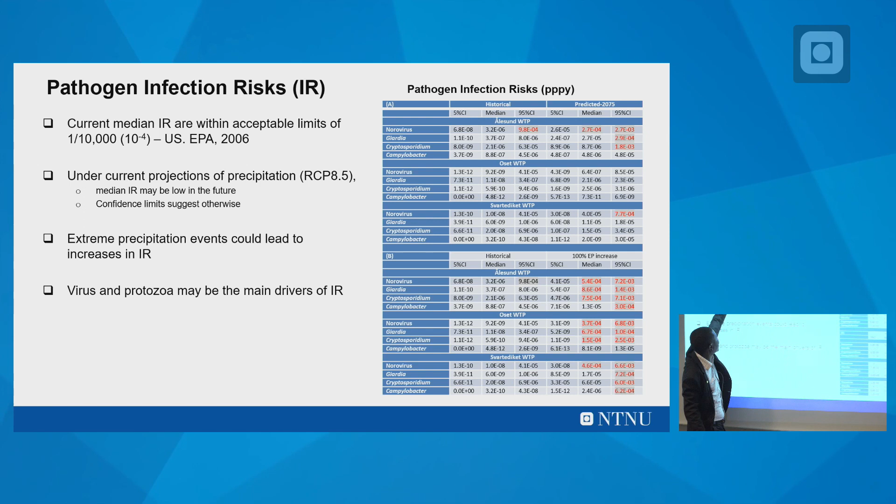But when we look at the extreme weather or extreme precipitation event scenario, we realize that even the median infection risks compared to this target may be quite high in case extreme precipitation or rainfall occurs in the catchment of each of the raw water sources.

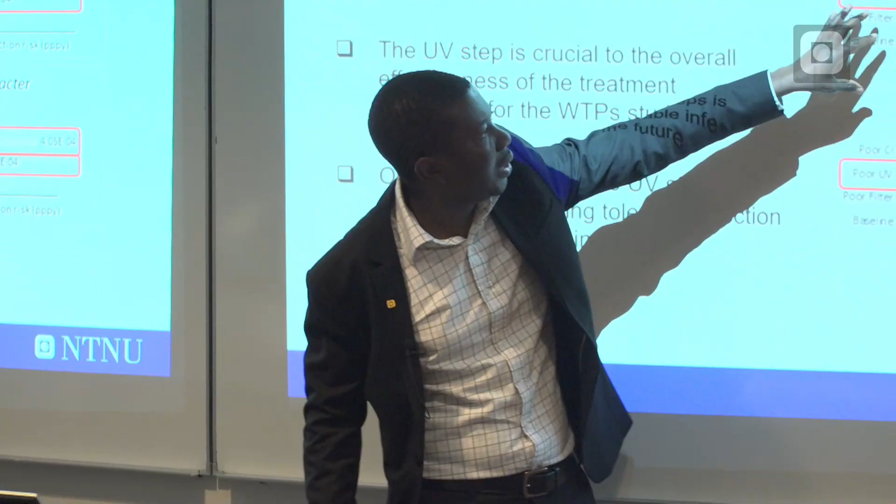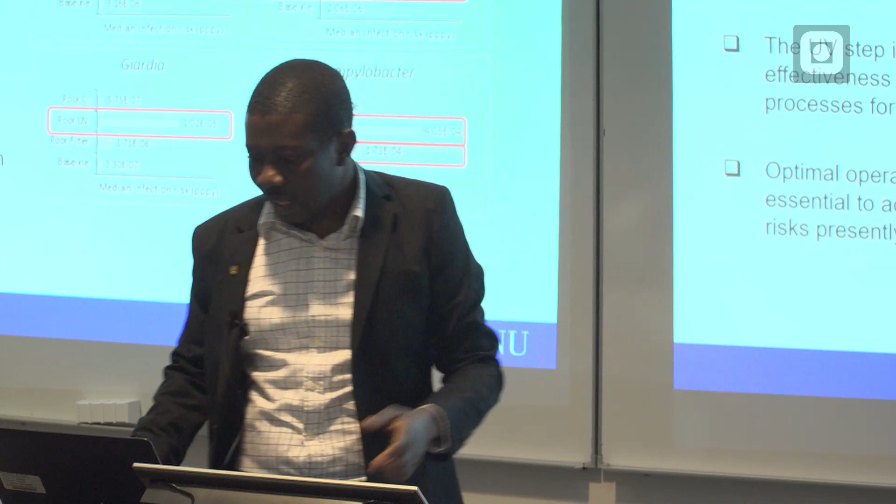The second step that came through at all the water treatment plants was the filters. But just as we realized that the log removal capacity of the chlorine system in the Ålesund water supply system was a bit low, it was realized that it has a very low effect on the overall infection risk. This suggests that optimal operation of the UV step in the water supply system is very critical, both presently and in the future.

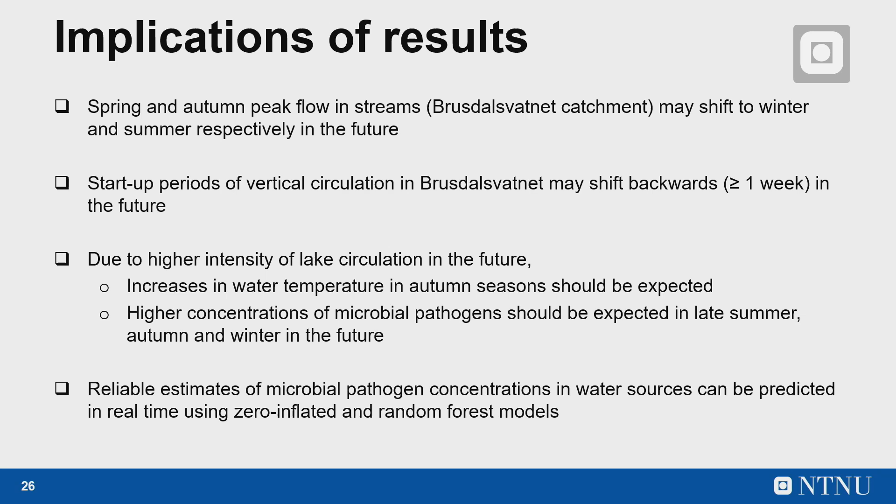We found that the spring and autumn peak flow in the streams, particularly the Brusdalsvatnet, will shift. The patterns of flow will shift in the future, and there will be changes in the startup period of circulations in the lake. Due to higher intensity of mixing in the lake, there will be increases in water temperature and higher concentration of microbial organisms.

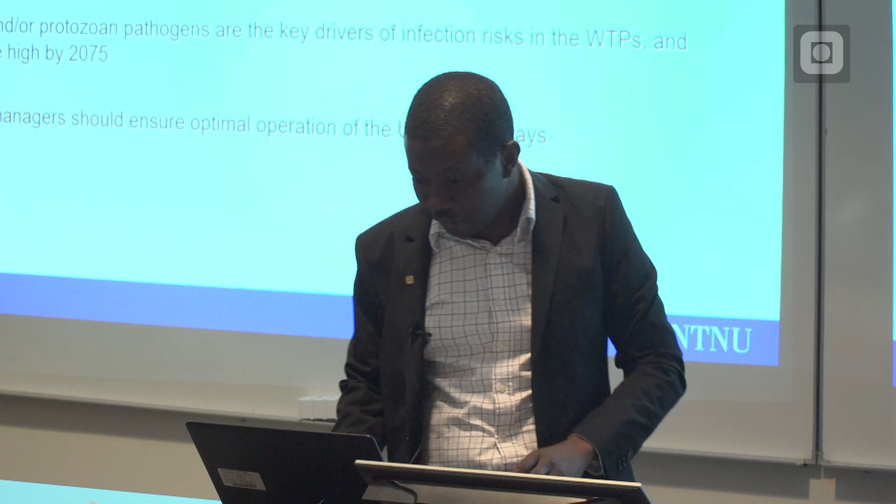Generally, smaller water treatment plants with very low microbial barriers could suffer in the future in the event that extreme precipitation occurs. From the results, it was noted that viral and/or protozoan pathogens may be the main drivers of risk in the future.

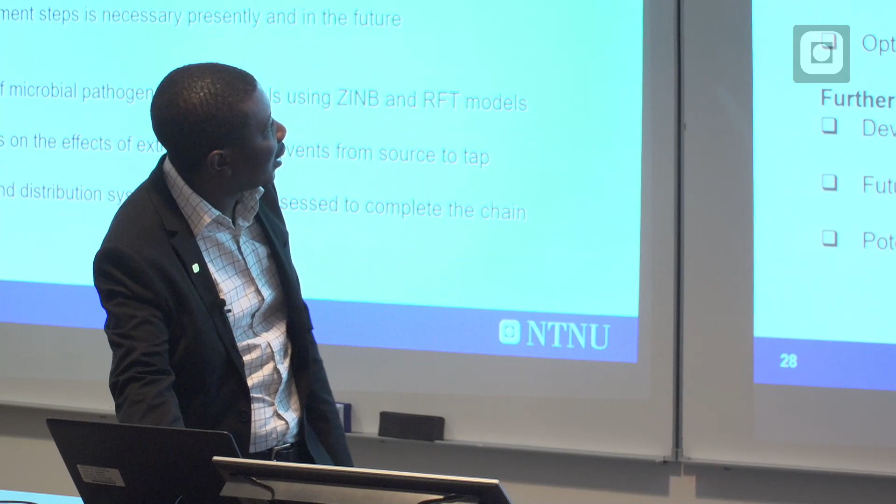So, some recommendations and further research. The results indicate that first we need to ensure improvement of weather stations, because climate impact assessment requires data from weather stations. But I noted that most of the weather stations located around the drinking water sources in the country are mostly not of good quality in terms of the data.

And then the water source tributaries should also be sampled if possible. This can help such future research. Source water protection is also very paramount, and that can prevent potential effects of the occurrence of extreme precipitation.

I have some further research areas that I think may be necessary to explore in the future. One is that since these results particularly indicate that compared to the projections, extreme precipitation is more likely to have an effect on the quality of the drinking water source, it may be more necessary to carry out the assessment based on extreme weather events alone instead of the projections. Also, the water distribution system can be included.